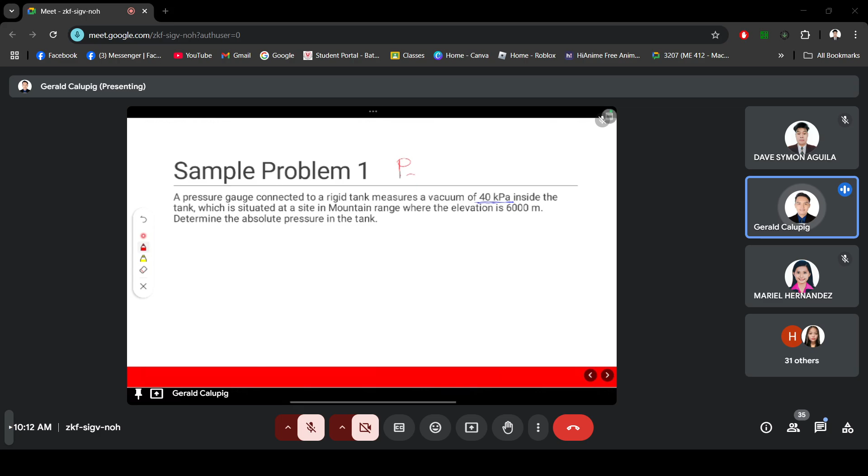P atmospheric, wait, let me write this. P atmospheric at 6,000 meters is equal to 47.2

kPa. So our formula for absolute pressure as required by the problem: P absolute is equal to P atmospheric plus P gauge.

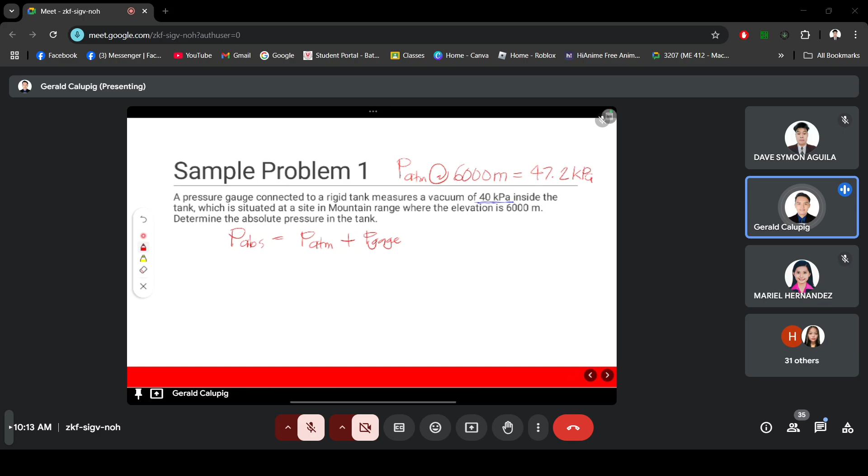Since we already have the value for the gauge, which is negative 40, and atmospheric pressure of 47.2 kPa, we can directly substitute that into our equation.

So we can have P absolute is equal to, our P atm is 47.2 kPa minus, since we have the vacuum pressure which is always negative, 40 kPa. Our P absolute is 7.2 kPa.

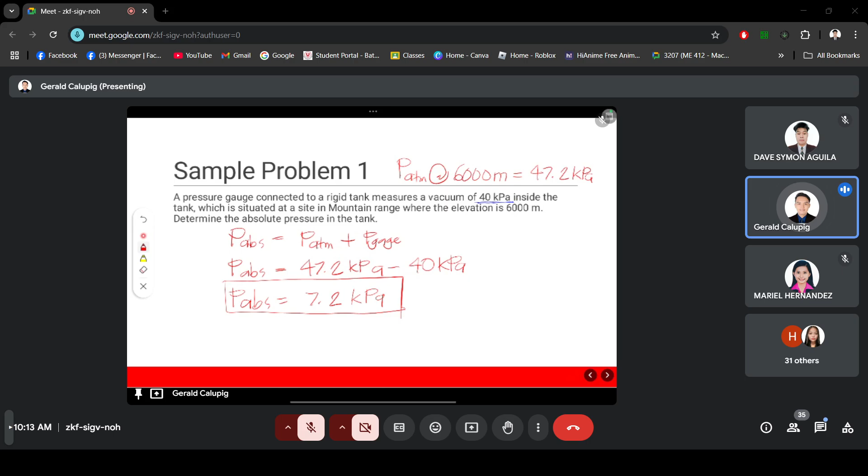Okay? Any questions? Okay, none. So we can move on to problem number two.

For sample problem number two, we have a 2 mm diameter clean glass tube inserted in water at 20 degrees Celsius. Determine the height the water will rise due to capillary action in the tube. The contact angle for the water can be taken as zero.

So I will draw the diagram so you can be properly guided. So this is the tube, and this is the force acting on the tube. Then also this is the air or the water.

Since this is filled with water, let's put water here. And we also have the weight of the water here in the tube. And we have here the H, the value of H.

So, based on our discussion last meeting, what is our formula for the surface tension force? Let's write it here. So this is diameter D.

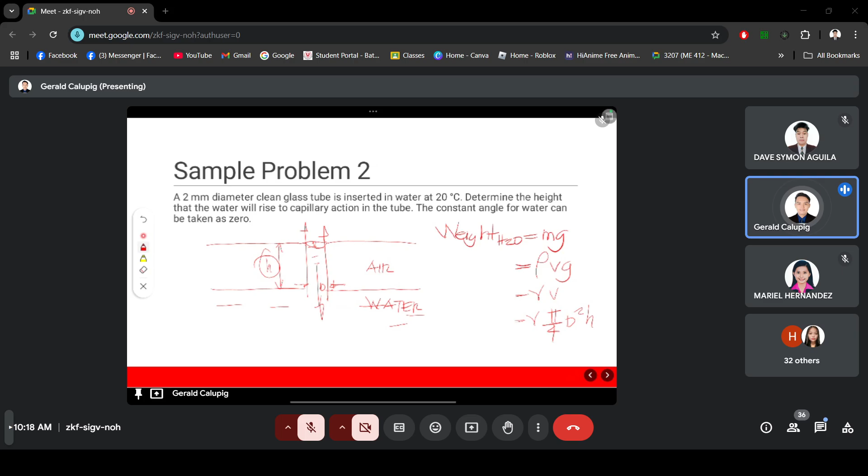Right? So we already have the weight of the water. We can equate that to the surface tension force. Our surface tension force can be equal to sigma times length.

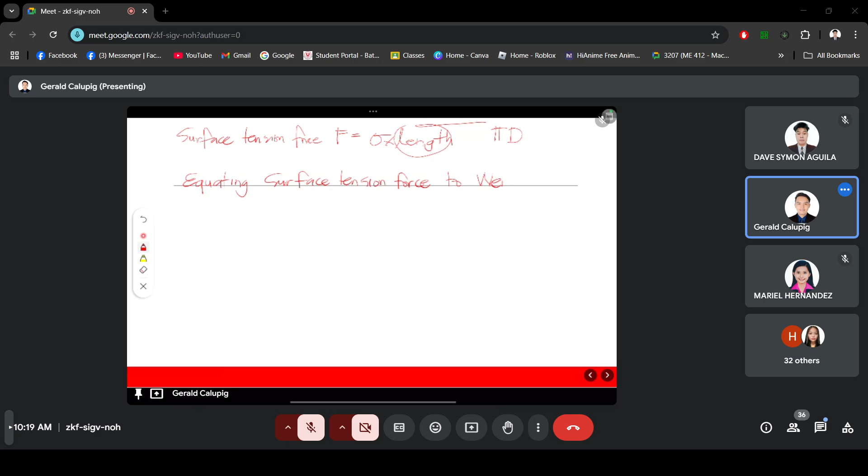Equating, wait, surface tension force to the weight of water. We can have sigma pi d is equal to specific weight times pi over 4 times d squared times h.

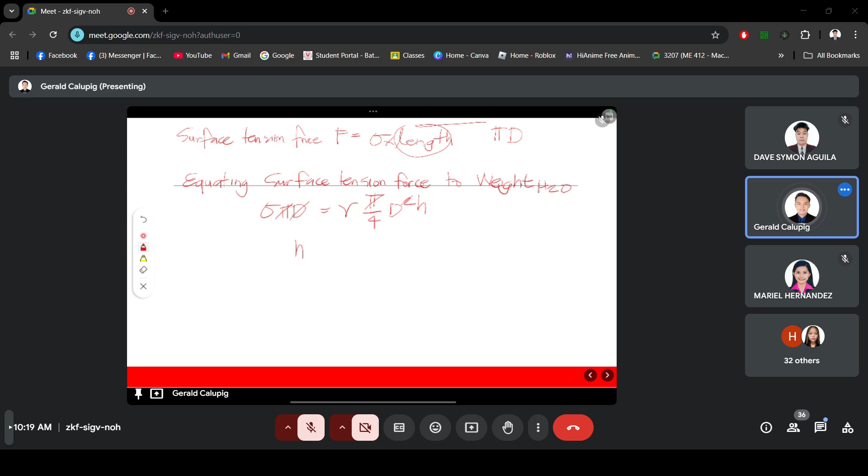We can cancel the pi and the d, or the diameter. So we can have, our value of h will be 4 sigma over specific weight times the diameter, right?

Okay, how do we get the sigma? Using the table of values, we can have the sigma at our given temperature, 20 degrees Celsius. Where our sigma at 20 degrees Celsius is 0.073 Newton per meter. Don't worry, I will give you the table of values later.

We will upload it together with this lecture. So we can substitute since we already have the sigma, the specific weight, and the diameter, right? So we can have H is equal to 4 times 0.073 Newton per meter over the specific weight. What is the specific weight of water?

9,800 Newton per meter cube times our... ano ang ating diameter na given? 2 mm, right? Meters. We can cancel. So our H will be what?

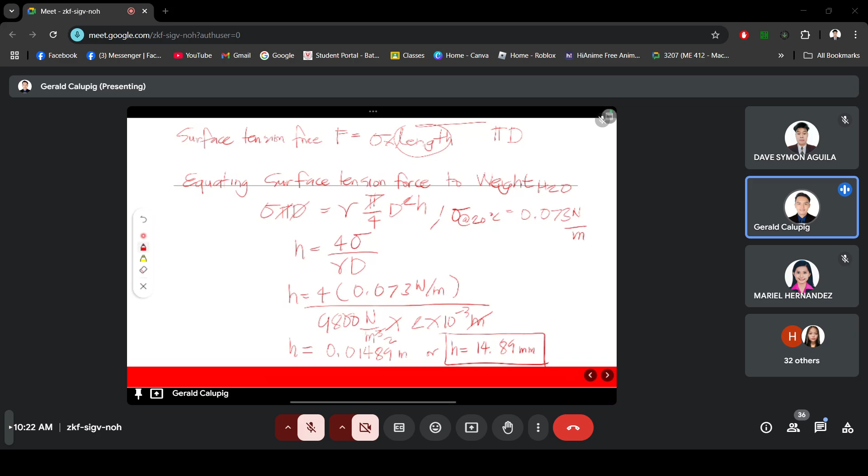Nakuha po ba? Please check po kung nakuha. Okay? If may question po ba? Thank you. May question po? Kung wala na, we can proceed to the next problem. The problem involving, yes po.

Sir, ask ko lang po sa mga sagot po. Ano pong rounding value po natin? For decimal places. Thank you po.

Okay. Next problem, we have sample problem number 3 involving the Mach number. So an aircraft flies at the speed of 800 kilometer per hour at an altitude of 10,000 meters above sea level. Determine the Mach number assuming the value of k is equal to 1.4.

So based on our previous discussion, ano yung value ng or ano yung formula ng Mach number? From the class, ang formula natin for the Mach number is M is equal to V over C, or velocity over the speed of sound or the speed of aircraft in this problem. So, ano yung value ng c? Ano po yung formula from yesterday na na-discuss natin? Ang formula ng c is equal to square root ng KRT,

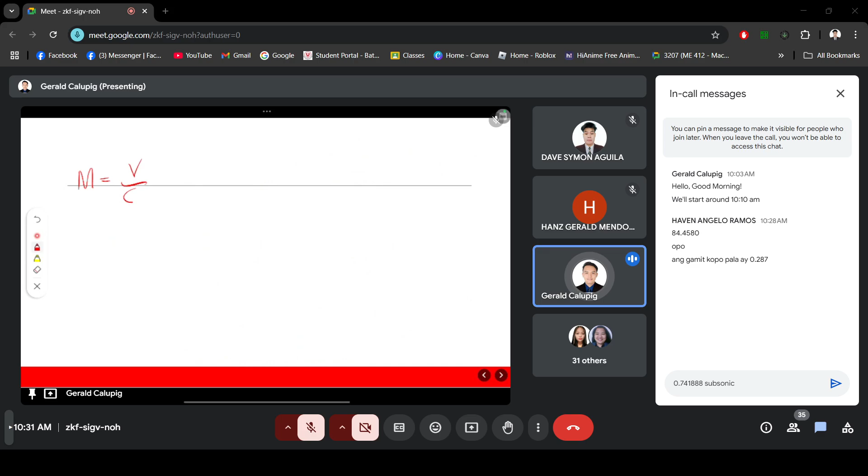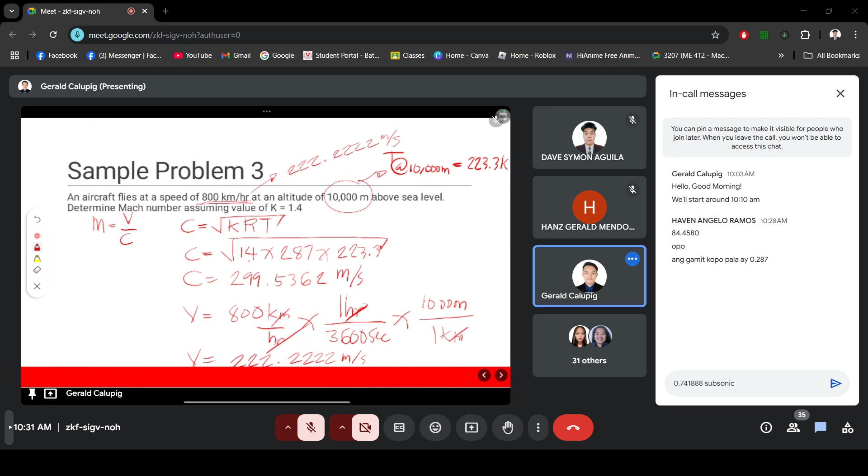Computing the Mach number, you can get V over C, which is 222.2222 meter per second over, ano nakuha natin? 299.5362. The answer will be 0.7419 po, okay. 0.7418. Di ba 889?

Right? So, based on our discussion yesterday, anong classification niya? Siya ba is subsonic, supersonic, transonic, hypersonic? Ano siya? Since ang M natin is less than 1, we can classify it as subsonic, no, yung speed niya, no? So we can have, since M is less than 1, it is subsonic, right?

Any question po? May question po ba?

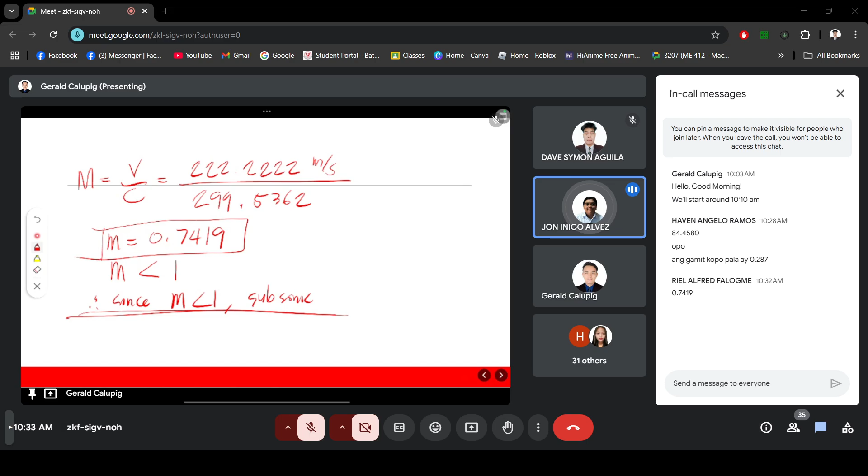Yes po. Sir, ask ko lang po sa continuous po ang solution niyo po, tapos sa final answer lang po magpo-put. Thank you. Yes. Pwede naman kahit mag-cut kayo kasi basta ano, 4 decimal places. Regardless kung siya is in the mid, in yung sa mga na-arrive nyo na values or sa final answer.

No, hindi naman ako very strict sa decimal places kung ang sagot nyo is 0.75, 0.73, 0.999, 0.70, ganon. As long as you have the process, tama ang process at malapit yung sagot, I think that should be fine. No? I can admit naman yung ano, yung sagot ninyo. Okay, thank you.

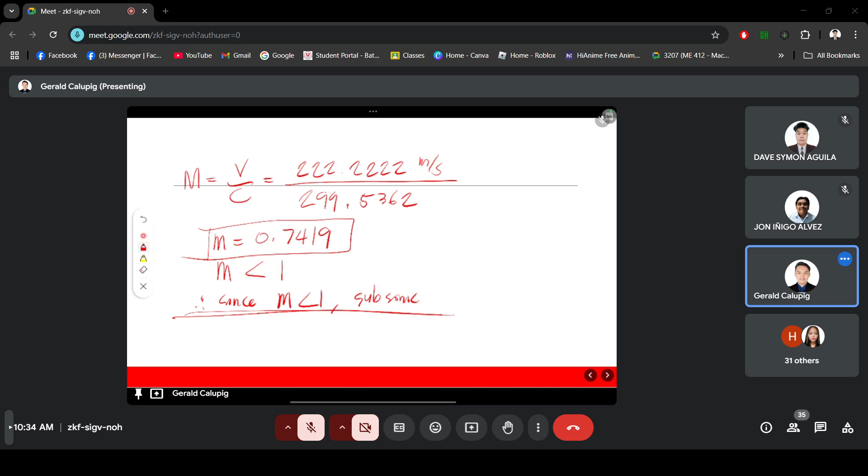Okay, if there is no question, we can move to sample problem number 4, which involves the Reynolds number. We have a Newtonian fluid having a viscosity of 0.38 Newton-second per meter squared and specific gravity of 0.91, flowing through a 25 mm diameter pipe with a velocity of 1.6 meter per second. Determine the value of Reynolds number in SI units.

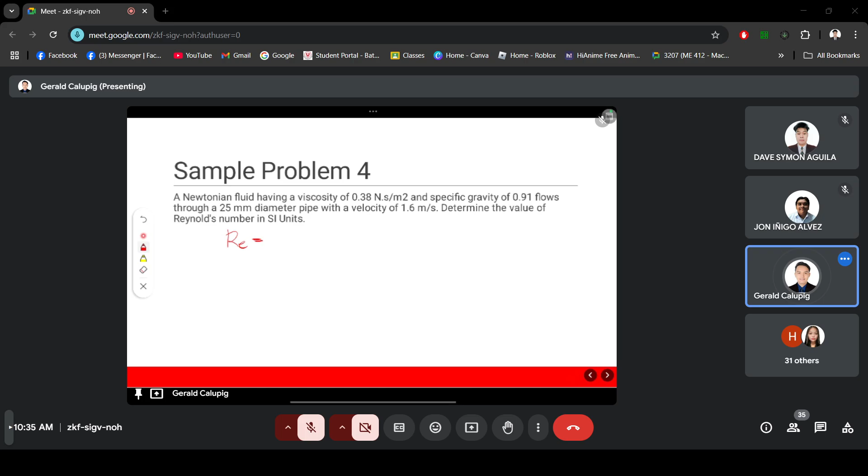Based on our discussion, what is the formula for Reynolds number? We have Re equals density times diameter times velocity, over the viscosity. Since we already have the given viscosity of 0.38 Newton-second per meter squared, and the specific gravity of 0.91 which can be converted to density of the fluid if you multiply that by the density of water, and we also have the diameter of 25 mm and velocity of 1.6 meter per second, please try to solve this Reynolds number.

Once you already have the Reynolds number in SI, you can solve also using the other system of units. For example, you want to convert that to English units because your system is in English units and your equipment requires English units. Please check - if you can solve it in SI, you can solve it also using English units.

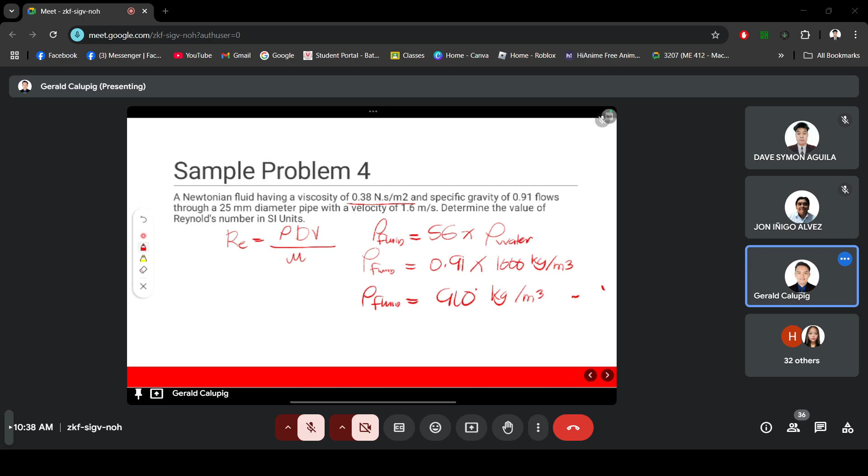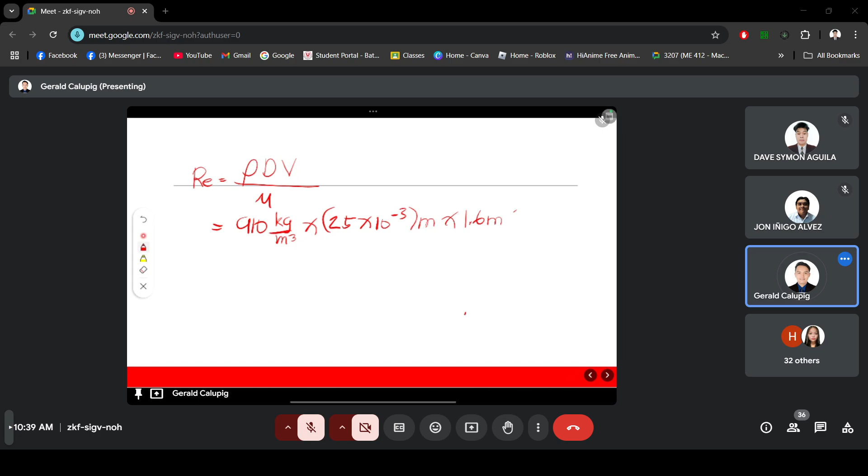So let's substitute so we can get the Reynolds number. We have Reynolds number equals density times diameter times velocity, over viscosity. We can have 910 kilogram per cubic meter times our diameter of 25 mm. Converting that to meters, we have 25 times 10 to the negative 3, times our velocity of 1.6 meter per second, over our given viscosity of 0.38 Newton-second over meter squared.

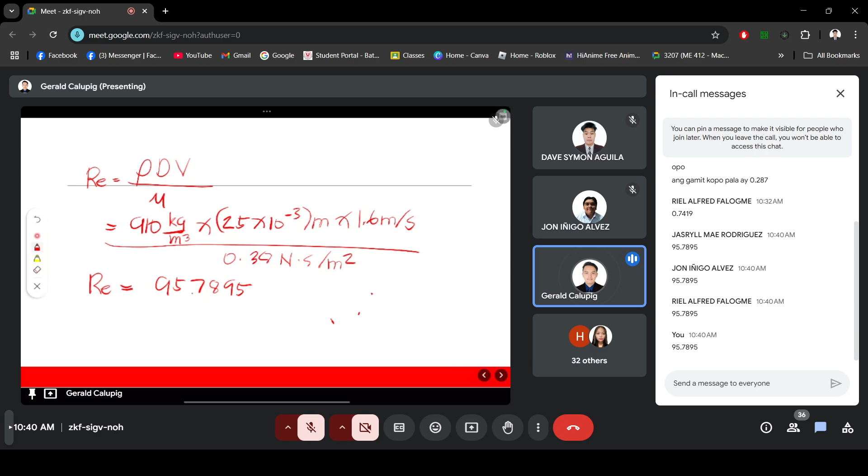What is the answer? 95.80 or 78.95, right? Okay, which one is it? Okay, thank you, thank you.

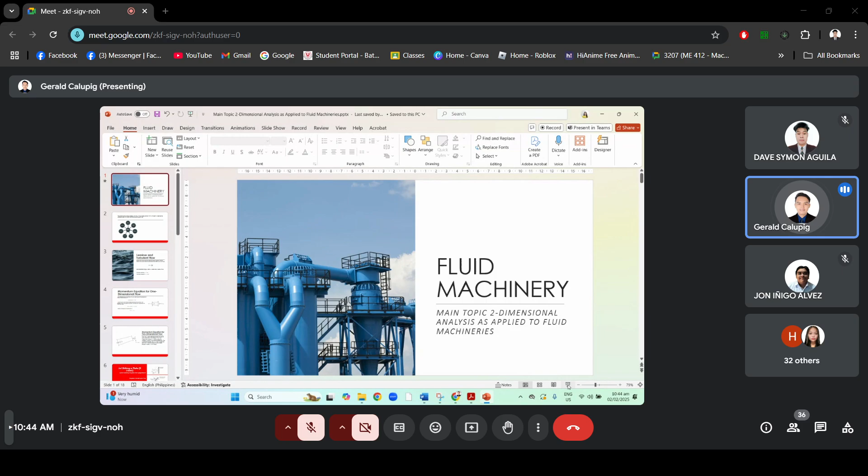Okay, let's continue our discussion. Main topic 2, the dimensional analysis as applied to fluid machineries. But first, we need to understand where the fluid mechanics, or the dimensional analysis, originated from before we apply that to fluid machinery.

First, we have the scope of fluid mechanics - how many areas does it have? We have dimensional analysis, properties of fluid, fluid statics, fluid kinematics, internal flow, external flow, and flow in turbo machines or fluid machineries. We already studied dimensional analysis, which deals with units of measurement in SI, both fundamental and derived units, and non-dimensional quantities - there are six of them: Reynolds, Mach number, Strouhal, Weber, the Euler number, and what's the other one?

Let's go back to that. Next is properties of fluid, which deals with measurement of mass, specific weight, specific gravity, compressibility of fluids, surface tension, and capillary action. That's what we solved earlier.

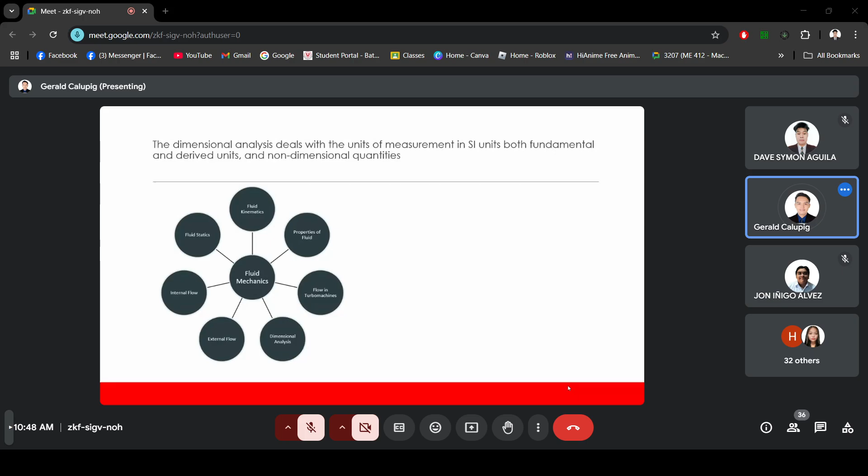Okay, next we have laminar and turbulent flow. In laminar flow, the streamlines move in parallel lines. In turbulent flow, the streamlines cross each other and the flow is diffuse. What's an example of laminar flow? When the fluid has high viscosity, such as honey, which is somewhat thick.

So its flow is parallel, or laminar. For turbulent flow, when you open a faucet, splashing of water, its force or velocity is very irregular. Same with wind. So we have two types: laminar and turbulent.

If we solve the Reynolds number, which is the formula of density times diameter of pipe times velocity over viscosity of fluid, when viscosity is high, the Reynolds number is lower. When viscosity is low, or when the fluid is not really diffuse, the Reynolds number is higher.

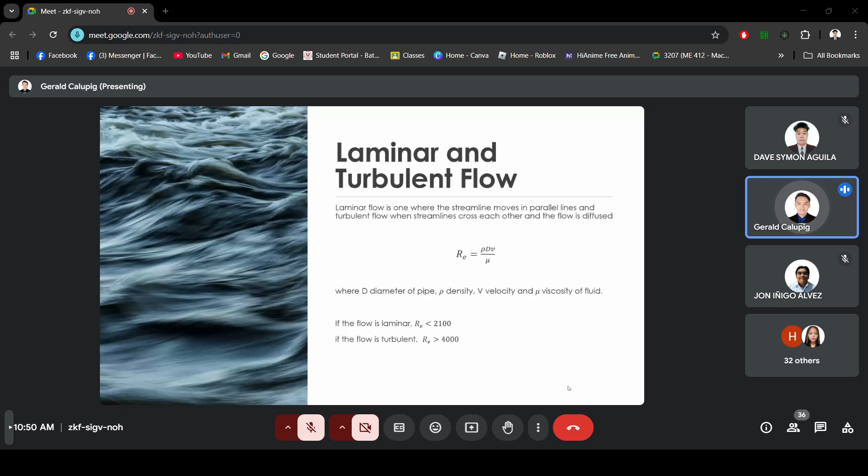Okay, so that's where hydraulic losses depend, whether the flow is laminar or turbulent. Any questions? If none, we can move to the next slide, the momentum equation for one-dimensional flow.

So here, the momentum of a particle of fluid is defined as the product of mass times velocity. Since according to Newton's second law of motion, the rate of change of momentum is proportional to the applied force, if there is a change in velocity of the fluid, that corresponds to a change in momentum of the fluid.

Considering this diagram or illustration, we have here the control volume. In order to determine the rate of change in momentum, we need to consider a control volume in the fluid, which is shown in the figure.

Let's assume the flow is steady and assume there is no storage within the control volume. The continuity equation for the mass flow rate will be: mass flow rate equals density times area times velocity at point 2, also equal to density at point 1 times area times velocity at point 1.

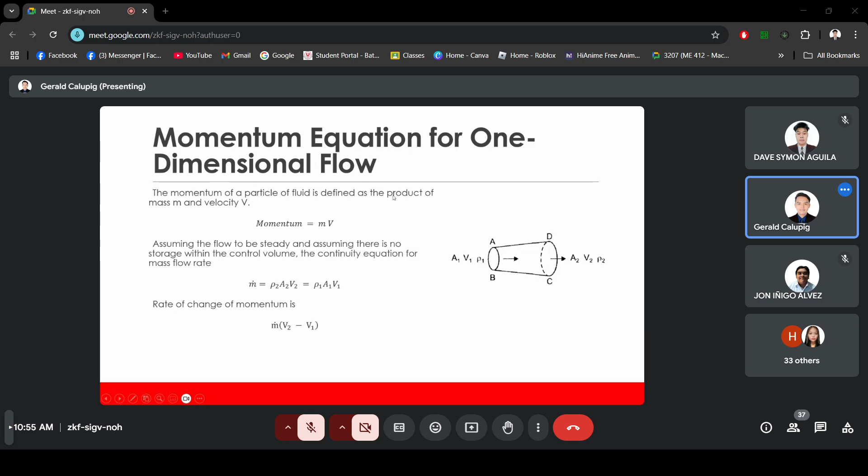Any questions for the momentum equation for one-dimensional flow? Any questions from the class? Hoping that you're getting it. Any questions?

None, we can proceed to the momentum equation for two-dimensional flow.

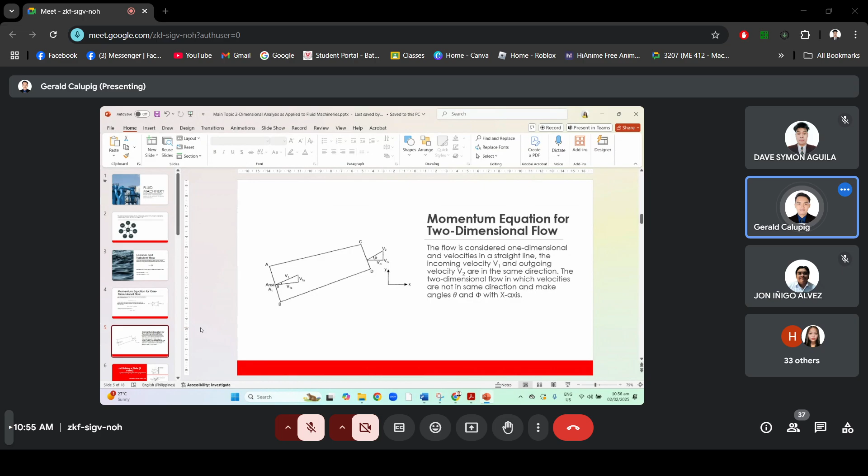So in this section, the flow is considered one-dimensional and the velocity in the straight line. The incoming V1, and we have also the outgoing velocity, and it should be in the same direction since we have one-dimensional flows.

Here in point 1, since it's a two-dimensional flow, we can have at the cross-section area AB, the axis or angle theta. And here in point 2, we can have the angle phi with respect to the x-axis.

So if we resolve that velocity in x and y direction, we need to have the velocity components of V1, which is V1x for the x component and V1y for the y component. Similarly, for V2 we can have V2x for the x component and V2y for the y component.

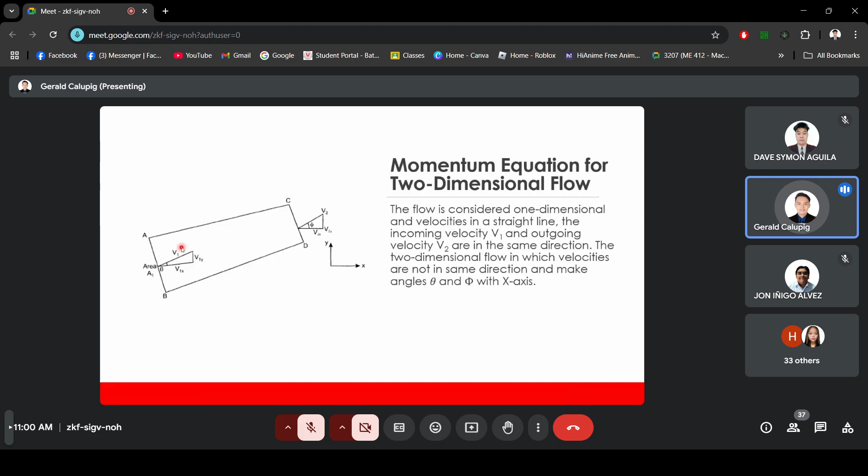Again, please recall your fluid mechanics as we will use that in our fluid machinery. Next is the jet striking on or striking a plate. We have three cases: case one is a jet of fluid striking a plate which is perpendicular; next is the plate inclined to the jet of fluid; next is the plate moving in the direction of the jet.

We need to consider a control volume enclosing the jet and the plate, so we can establish our study with this control volume being fixed relative to the plate, and therefore moving with it. So the components of the velocity perpendicular to the plate are considered in case number one. For case number one, if the plate is both stationary and perpendicular to the initial jet direction, we can have force equal to density times area times v squared.

Since we don't have the angle, always remember force is equal to density times area times v squared. This is the same formula as before. When the plate is stationary and inclined, as in case number 2, we can have the formula for force equal to density times area times velocity squared times cosine theta, because we have an inclination or angle theta.

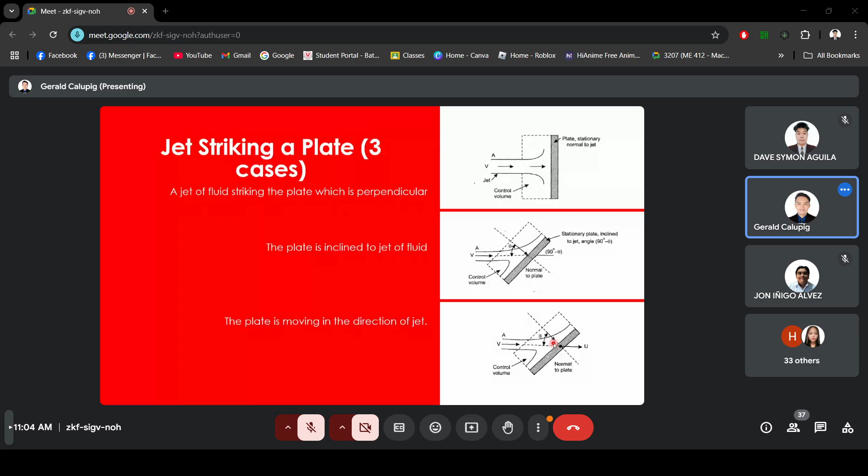Next is the force exerted when jet is deflected by a moving vane. This equation is being used in the Euler triangle, similarly what we'll be using on the impeller and the blades for the pumps and turbines. So in point one, we have fluid.

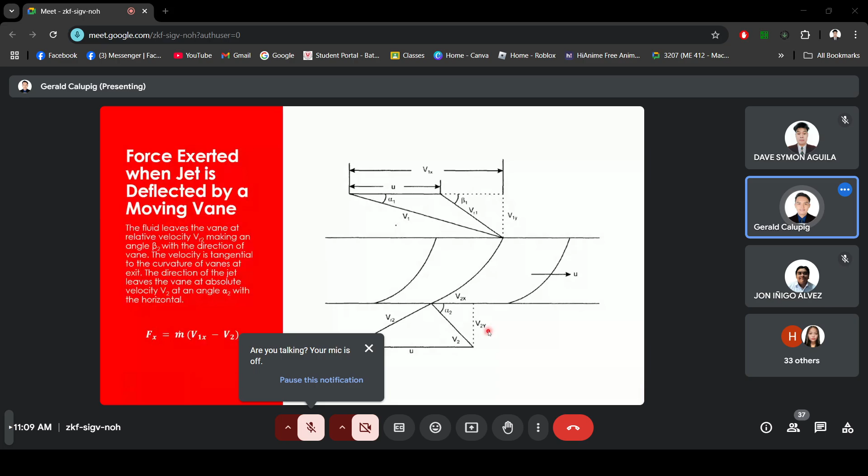Any questions for the deflected moving vane? Any questions? If none, we can proceed to the Euler and Bernoulli's equation, so we can apply this to our future problem solving.

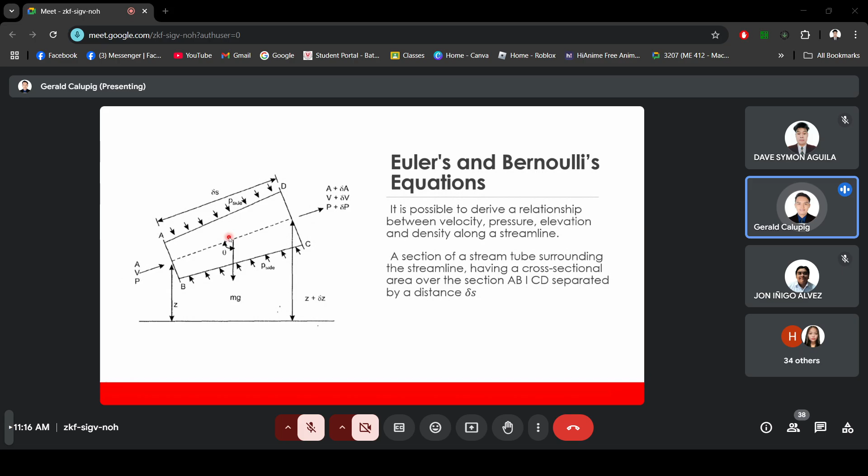The relation between pressure, velocity, density, and elevation along the streamline -- this is the Bernoulli equation. It was derived using the differential form so we can arrive here: P over specific weight plus V squared over 2G plus Z is equal to a constant.

What are the applications of the Bernoulli equation? There are many applications: airfoils, automobiles, free jet, pumps, turbines, and Venturi meter. But for our discussion, we will consider the free jet, pumps, and turbines. The Venturi meter is for fluid mechanics, for measuring flow rate.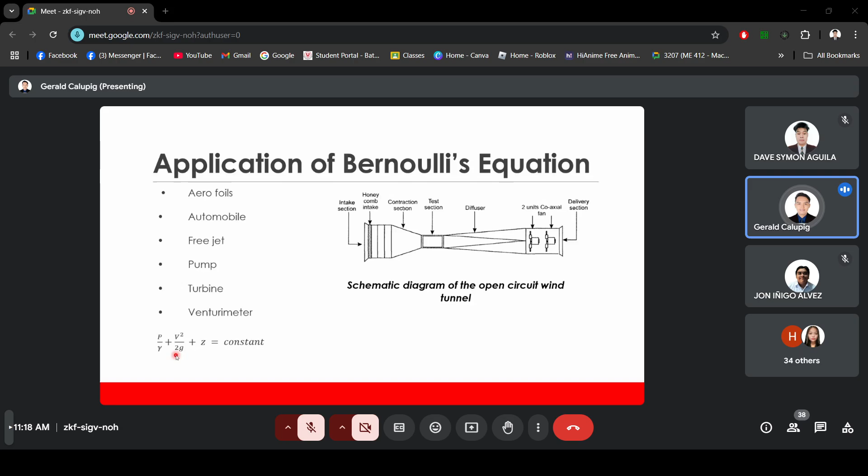In this presentation, you can see the schematic diagram of an open circuit wind tunnel -- that uses the Bernoulli equation, similar to the form in a Venturi meter. For another application, you can have the pressure distribution test carried out by a wind tunnel for an airfoil.

Here, when the velocity is high, the pressure is low. When the pressure is high, the velocity is low. Same with the automobile -- the distribution of force or pressure over the model of an automobile in a wind tunnel. If you have software for CFD, computational fluid dynamics, you can simulate that also.

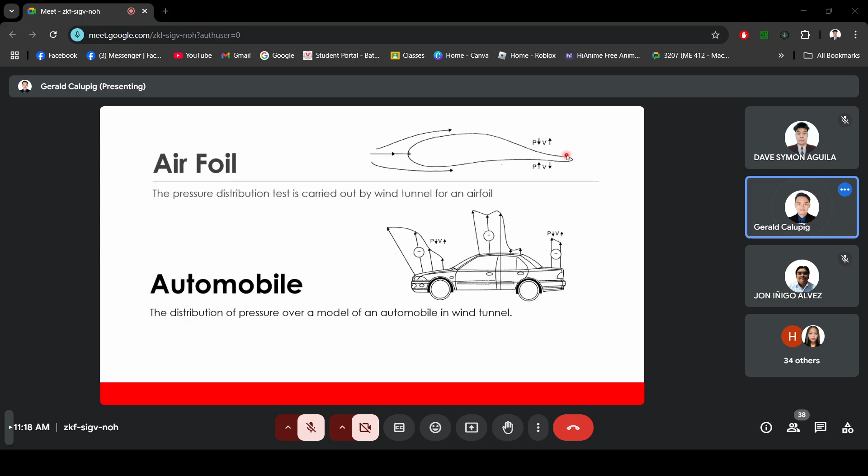Next is the free jet. If we apply the Bernoulli equation to the free jet shown in this figure, we get the formula for free jets: V is equal to root of 2GH, because since there's no pressure here, we can cancel that term. Since it's frictionless, we can cancel this one too, and this one as well. So we arrive at V squared over 2g equal to z1 minus z2, equal to h. So the value of V is equal to square root of 2gh.

That's how we arrive at the free jet equation, derived from the Bernoulli equation.

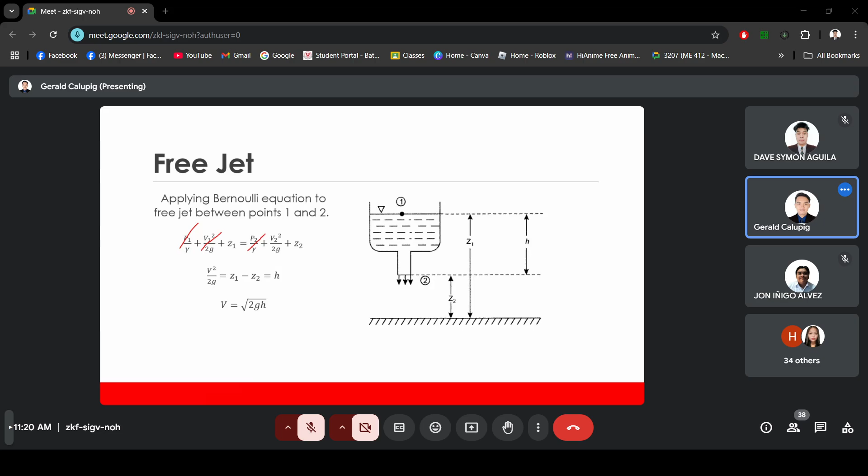Next is the pump. If we also apply Bernoulli's equation in the modified form to include pump installation as shown, we can have the Bernoulli equation: P1 over specific weight plus V1 squared over 2G plus Z1 equal to P2 over specific weight plus V2 squared over 2G plus Z2. But for the pump, since the pump is a power-absorbing machine, we consider the head developed to be negative.

So if you solve for the head developed, you need P1 minus P2 over specific weight, plus V1 squared minus V2 squared over 2G, plus Z1 minus Z2. Or vice versa, you can have HP equal to P2 minus P1 over specific weight, plus V2 squared minus V1 squared over 2G, plus Z2 minus Z1. That's from the pump -- it is the total dynamic head.

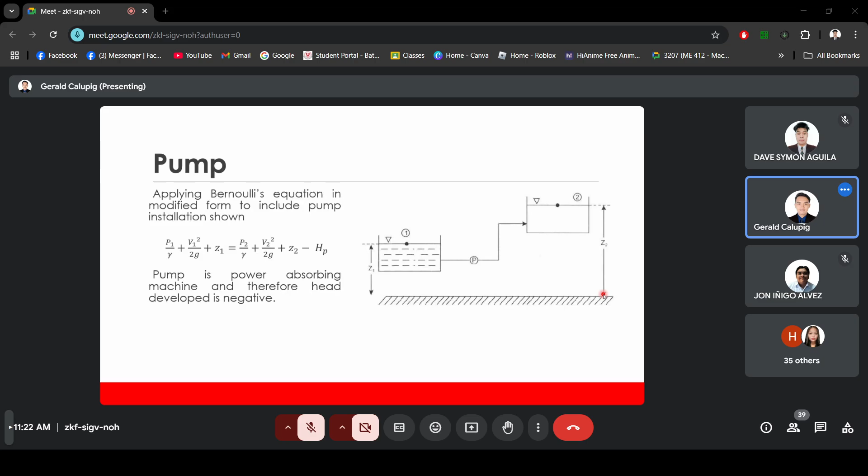Similarly with the turbines, applying Bernoulli's equation, since the turbine is a power-producing machine, the head developed is positive, since it goes down. We have HT equals P1 minus P2 over specific weight, plus V1 squared minus V2 squared over 2G, plus Z1 minus Z2, since point 2 is lower than point 1.

Any question before we proceed to the next application? This is the last application of Bernoulli's equation.

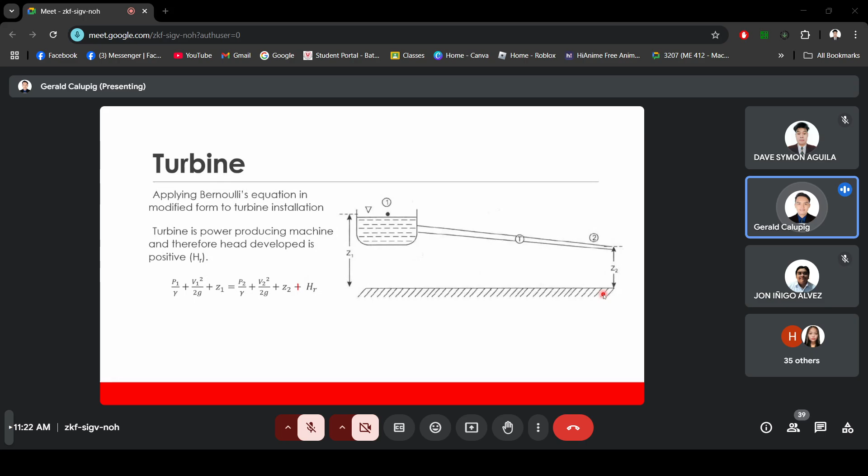We have flow measurement. Bernoulli's equation can be applied to measure flow rate in a pipe by a Venturi meter. The Venturi meter has three important portions: a converging part, a constant area or throat, and the diverging part.

For the Venturi meter, we have the converging part leading to the throat. It consists of a short converging conical tube leading to a cylindrical portion called the throat, followed by a diverging section in which the diameter increases again, and it is attached again to the main pipeline.

So going back to the converging part of the Venturi meter, the pressure always decreases and the velocity increases going to the throat, while in the diverging section or part, the pressure increases since it comes from the throat, and the velocity decreases since the cross-sectional area becomes larger.

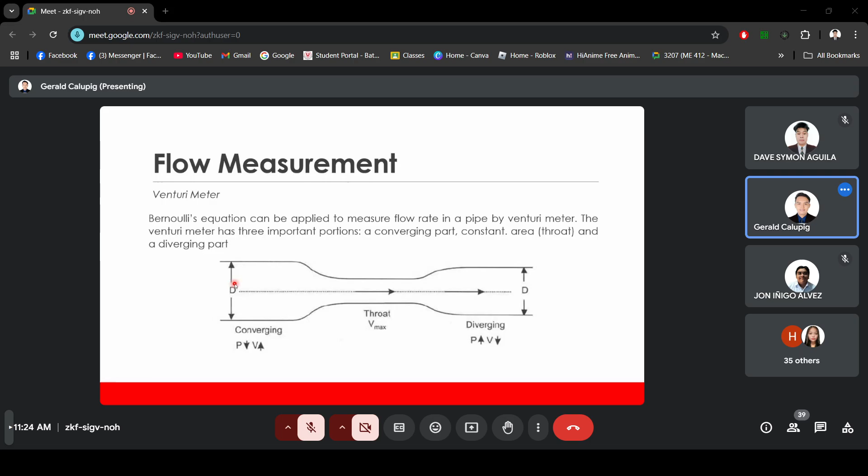So here we arrive at the value of Q. The theoretical discharge Q is equal to A2 times the square root of 2g times (P1 minus P2) over density, divided by the quantity squared root of 1 minus (A2 over A1) squared.

In practice, some losses of energy occur between point 1 and point 2. Therefore, the actual discharge QA will be less than the theoretical discharge. Before, in solving problems involving pumps, we were given CD, the coefficient of discharge, but now we can solve that. CD is equal to the actual discharge over the theoretical discharge.

Any question for the Venturi meter?

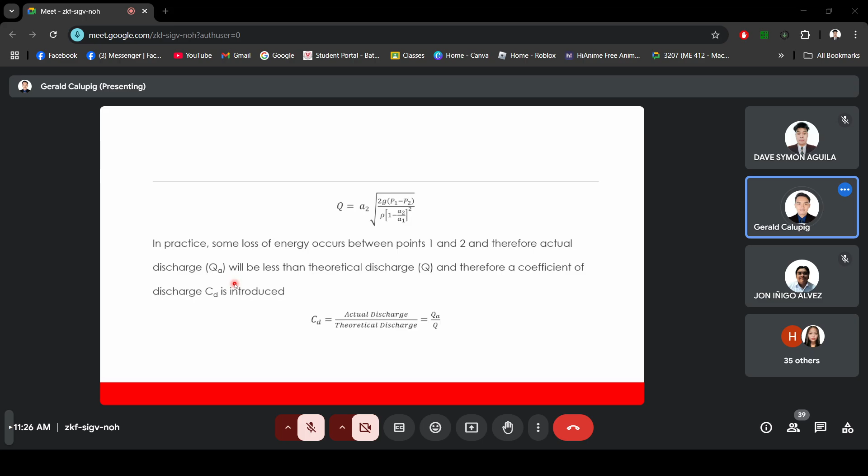Okay, do we have any questions? In this piezometer, what we always measure is the static pressure, and the total pressure, and the difference is the dynamic pressure.

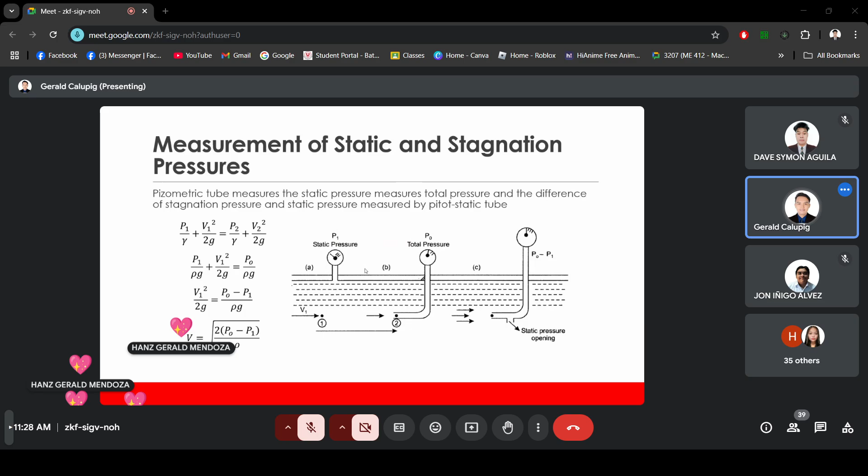Remember that this is just a review of your fluid mechanics. We're not yet at the exciting part, we haven't started fluid machinery yet. I'm just reviewing you so you can answer during the examination, because sometimes you can't apply the formulas for fluid machinery if you don't have the basic foundation in fluid mechanics.